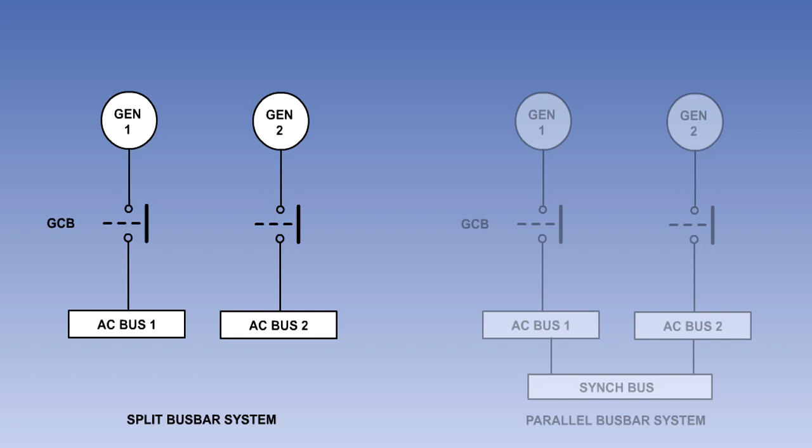Multi-engine aircraft AC supply distribution systems will either be of the split busbar type, where each generator operates independently, or of the parallel busbar type, where each generator carries a share of all the loads. In this lesson, we will look at a parallel busbar type of system, as fitted to a 4-engine Boeing aircraft.

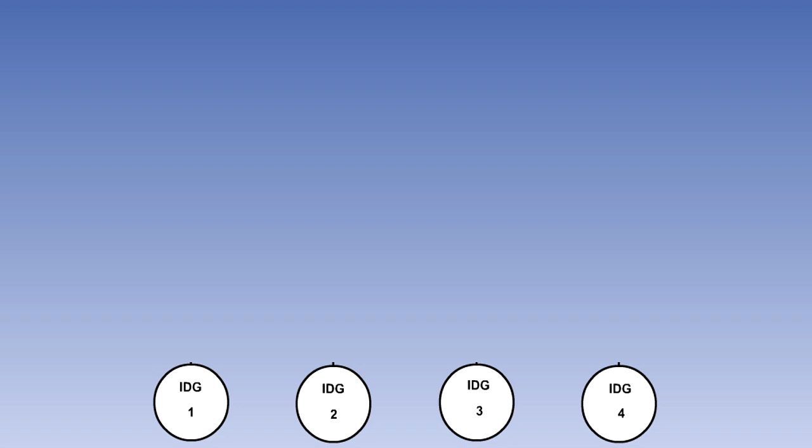Each of the four 115/200 volt, 400 Hz, 3-phase engine-driven integrated drive AC generators, or IDGs, is connected to its respective load busbar by a generator control breaker, or GCB.

Busbars 1 and 2 can be connected to the left synchronizing busbar through bus tie breakers. Busbars 3 and 4 can be connected to the right synchronizing busbar in the same way. All loads are connected to the load busbars. The synchronizing busbars have no loads attached to them. The left and right synchronizing busbars can be connected together by the split system breaker.

The auxiliary power unit, or APU, drives two generators. APU generator 1 connects to the left synchronizing busbar and APU generator 2 to the right. The APU generators do not have constant speed drive units, so they cannot be operated in parallel with any other generators.

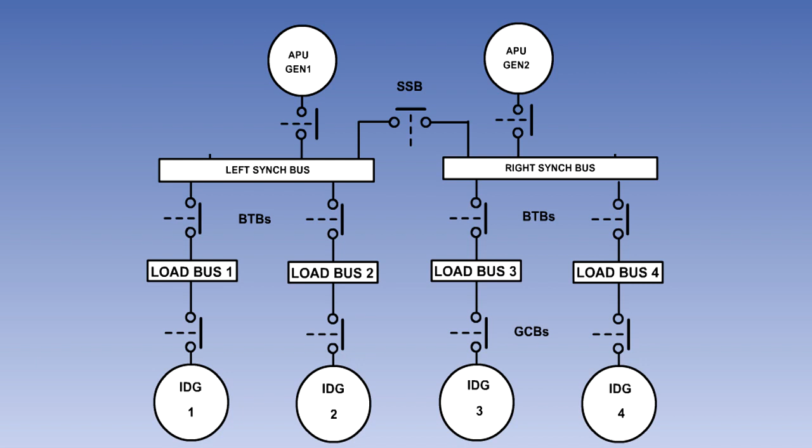Two AC external power carts can be connected into the electrical system. One connects to the left synchronizing busbar and the other to the right. As with the APU generators, external power carts cannot be operated in parallel with any other power source.

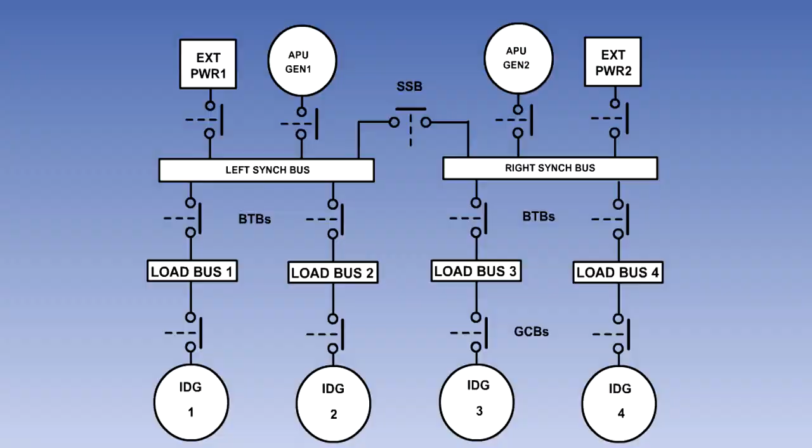Operation of the system is almost fully automatic. However, there is a control panel which firstly keeps the pilot informed of the current configuration, and secondly allows him to override certain functions if required.

We will have a look at the operation of the system and the indications the pilot can expect to see, starting with the aircraft stationary on the ground with no engines running.

If the APU is running and the outputs from its generators are satisfactory, available lights will be illuminated in their switch lights. Similarly, if external power carts are connected to the aeroplane and their output voltages and frequencies are satisfactory, available lights will be illuminated in their switch lights.

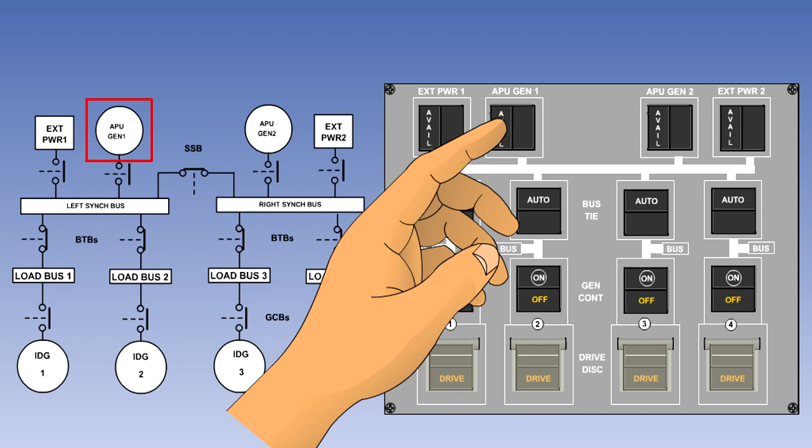The pilot can connect one of these power supplies to the busbars by pressing its switch light. This will connect the selected source to the left or right synchronizing busbar. The split system breaker is normally closed, unless there is a fault, so the supply will also be fed to the other synchronizing busbar.

The bus tie breaker, or BTB switch lights, are normally latched in with auto illuminated. In this position, the BTBs will remain closed unless there is a fault. Therefore, the selected source will power all four load busbars through their BTBs.

If an APU generator or external power supply is connected to the other synchronizing busbar, then the split system breaker, or SSB, will automatically open to separate the two sources of supply.

Each of the four engine-driven generators has a generator control switch light and a guarded drive disconnect switch light. Each drive disconnect switch light has an amber drive light which will illuminate if its associated IDG oil pressure is low or oil temperature is high.

The guard can then be raised and the switch operated to disconnect the IDG from the engine. Remember that the engine must be running at a minimum of idle RPM before this action is taken. At the moment, the drive lights are all illuminated because the engines aren't turning.

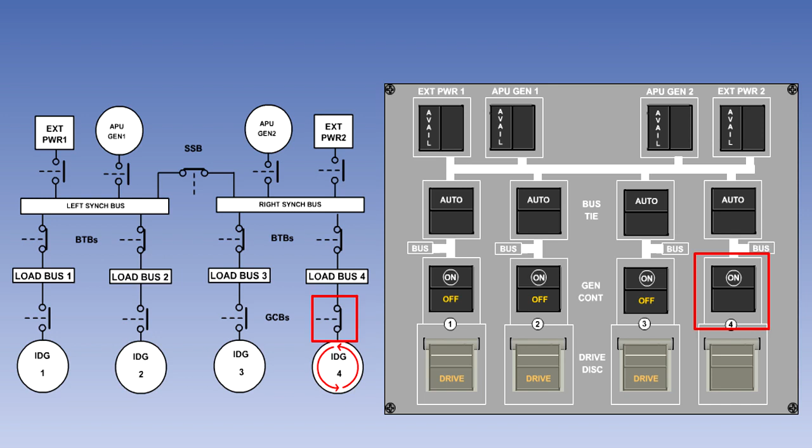Number 4 generator will now supply its load busbar, and through its BTB the right synchronizing busbar. From here, busbar 3 will be supplied through its BTB, and the left synchronizing busbar through the split system breaker. Busbars 1 and 2 will be powered from the left synchronizing busbar through their BTBs. Thus, generator 4 will be supplying all of the loads.

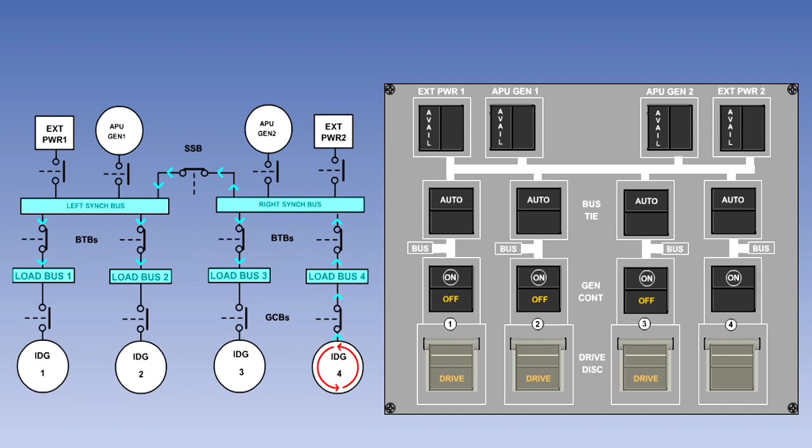As each subsequent engine is started, the output voltage, frequency and phase rotation of its generator are adjusted to align with the voltage, frequency and phase rotation of the generator or generators already supplying the busbars. And when all are aligned, the associated GCB will close, allowing the generators to operate in parallel.

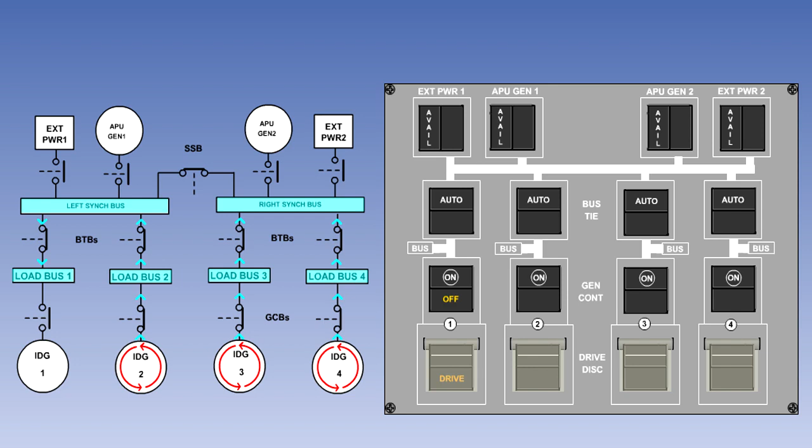The APU will be stopped and external power will be disconnected prior to taxi. So with all generators operating normally, the control panel will look like this.

In the event of a fault on an individual generator or an engine failure, the associated GCB will automatically open and the other in-parallel generators will carry the load with no loss of supply. If there is a short circuit fault on a busbar, the breakers surrounding the faulty busbar will automatically open to isolate the area with the short circuit.

A short circuit on the left synchronizing busbar, for instance, will cause the split system breaker and bus tie breakers 1 and 2 to open, isolating the affected busbar.

The system is almost completely automatic. The pilot does not normally make any selections apart from selecting the APU generators or external power on. If it is required, he can latch out any of the GCB or BTB switch lights, locking the associated breaker open.

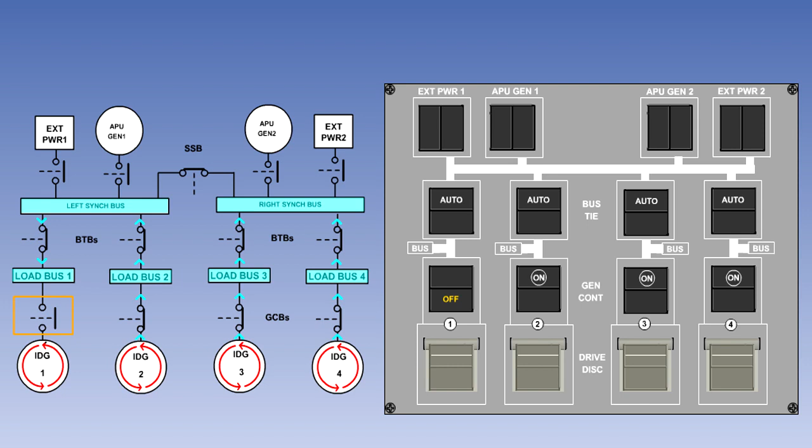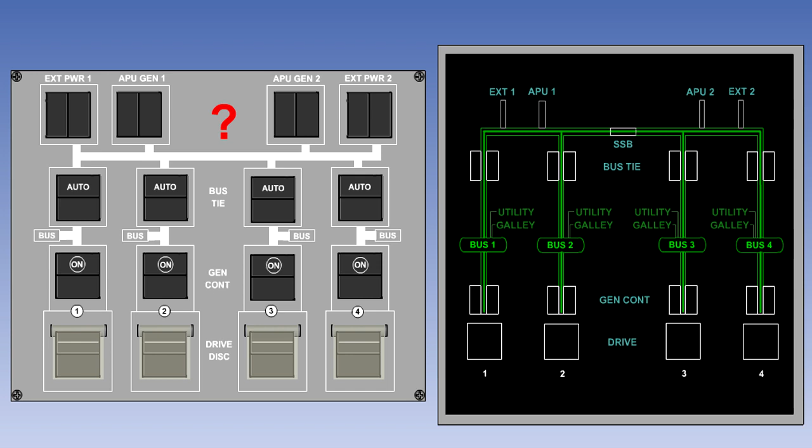You will notice that there is no indication on the control panel of the status of the split system breaker. It is, however, possible to view a synoptic of the system on one of the aircraft's electronic screens, and this includes the SSB. This picture shows the system operating normally with the SSB closed.

The synoptic display also reflects any abnormal system configurations or faults. In this example, number 3 bus tie breaker is open, and number 2 IDG has either a high oil temperature or low oil pressure fault.

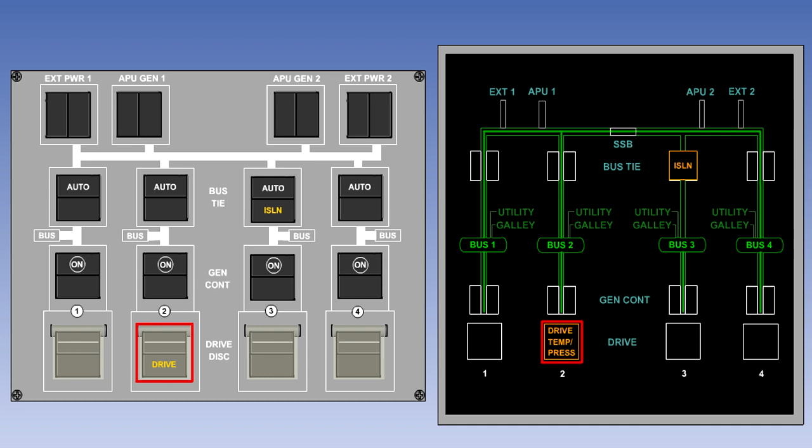DC loads are supplied from transformer rectifier units connected to the load bus bars. Emergency AC power is provided by a static inverter supplied by the aircraft battery and emergency DC power directly by the battery. These systems are connected in much the same way as in a split busbar system and are fully explained in the split busbar systems lesson.

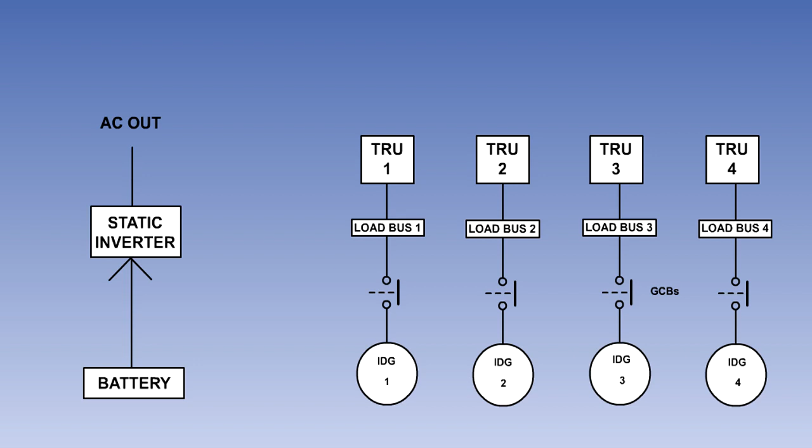That is the end of the lesson. Here is a summary of the main points.

The generators are connected to their load bus bars by generator control breakers. The load bus bars carry all of the loads. Bus tie breakers connect the load bus bars to the synchronizing bus bars. The synchronizing bus bars are connected together by the split system breaker.

APU generators or external power supplies cannot be operated in parallel with any other power source. The output voltage, frequency and phase rotation of each generator is adjusted to align with the voltage, frequency and phase rotation of any generator or generators already supplying the bus bars before it is allowed to connect to the bus bars.